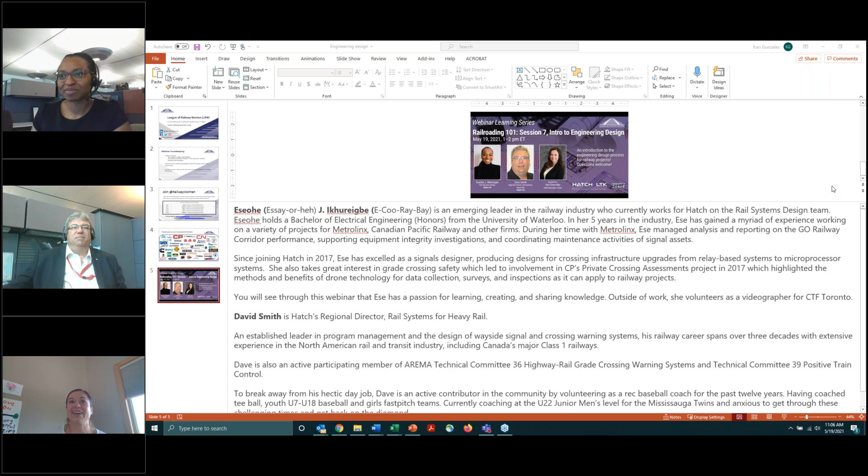Okay. All right, we can hear you, we can see you. I think you're ready to go. Okay, awesome, sounds good. Good day, everyone.

It is my pleasure to be presenting on the topic of Introduction to Engineering Design, specifically looking at railway applications as the overarching theme. The intent of this presentation is not meant to be predominantly technical. My aim is to provide a high-level overview to familiarize us with what engineering design is, why it's important, and what the engineering design process can look like within the railway industry.

A brief look at the outline for today: I will kick us off with a safety share. Safety is such a huge part of what we do, and one of the things we strive for within our various organizations is to achieve no harm. So I think it's important that we start off on a safety note. After that, I'll get right into engineering design, defining it, what the process is, and why it's important.

Then I'll switch gears into railway applications, looking at examples of applications. After that I'll cover the engineering project lifecycle overview, giving us a sense of what the lifecycle can look like for an engineering project. And I have a project example that I'll use to tie all the concepts together.

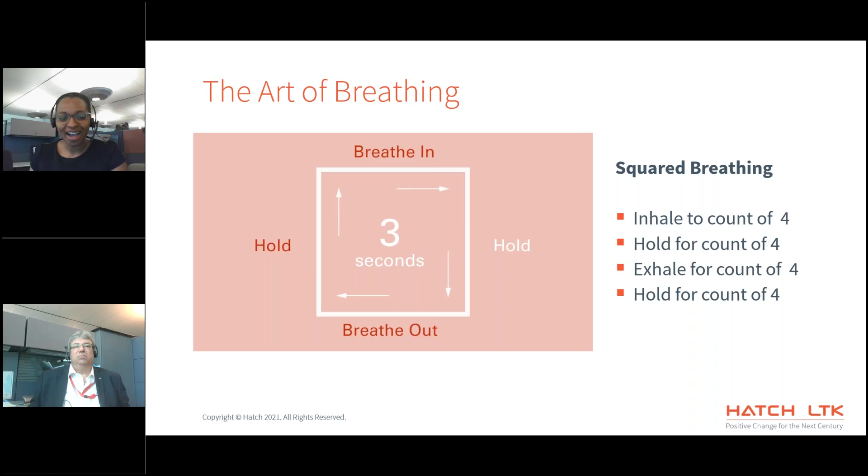There are so many ways we can breathe, but one method I picked for today is square breathing. Essentially how it's performed is we inhale for a count of 4, hold our breath for a count of 4, exhale for a count of 4, and hold for a count of 4. Before we carry on into the technical side of this presentation, I think it's important that we practice this, so I'm going to play a video on the next slide and have everyone do it with me.

I can't see everyone's reaction, but regardless of the day you've had, whether you've been on a high note or a low note, I think it's important that we both practice this together. So I encourage everyone to, wherever you are, sit up, relax your shoulders, and try to stay present in this moment.

I'm just going to cue that up. By the time I count down to 4, we're going to start off with the inhale. We'll inhale for 4 seconds, hold our breath for 4 seconds, then exhale for 4 seconds and hold for 4 seconds. I'll go 2 rounds of this, and there's going to be a visual cue that lets you know what cycle we're in.

Counting down now: 4, 3, 2, 1. And we hold.

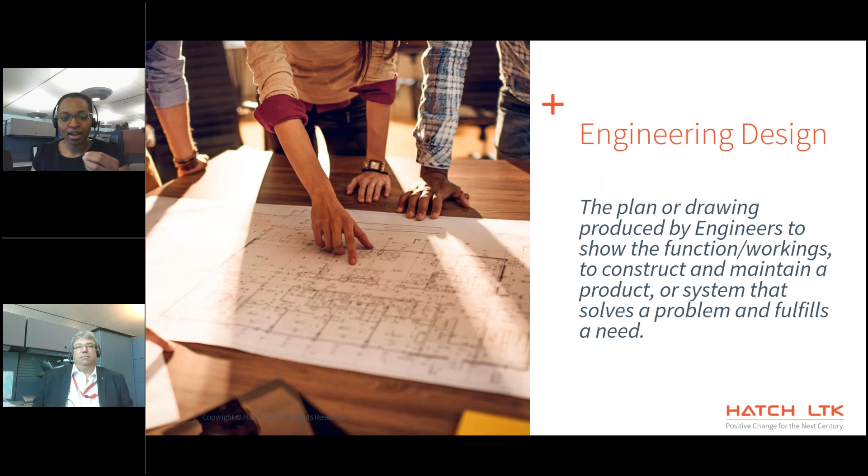The engineering design process is defined as a series of procedures that engineers follow to produce a solution to a problem. Essentially, it's the way that we get to the outcome of our solution, so all the methodologies and everything intricate to that portion is pretty much what the process is.

For example, consider a design-bid-build project that has a client who needs a problem solved. They outsource that design to the engineering consultant, who is responsible for the design of the solution. You also have a contractor, who can be outsourced to be responsible for building, testing, and commissioning that solution. And then a vendor, who is responsible for manufacturing and supplying the parts used for that solution. So what can the process look like for the different parties involved?

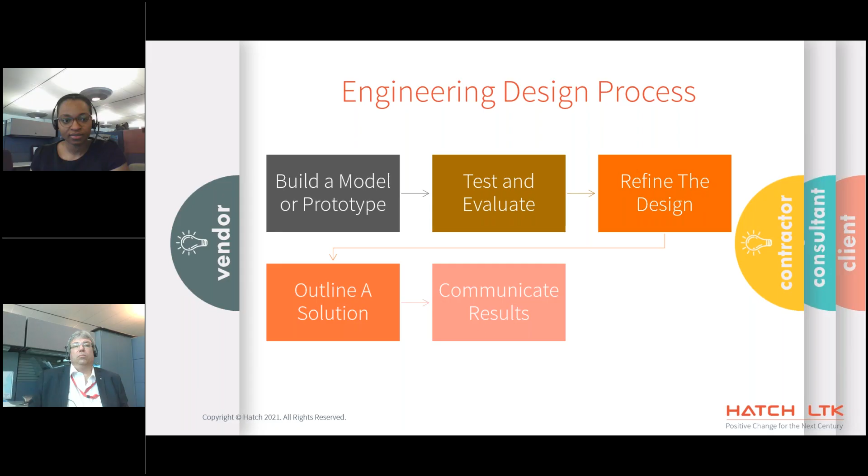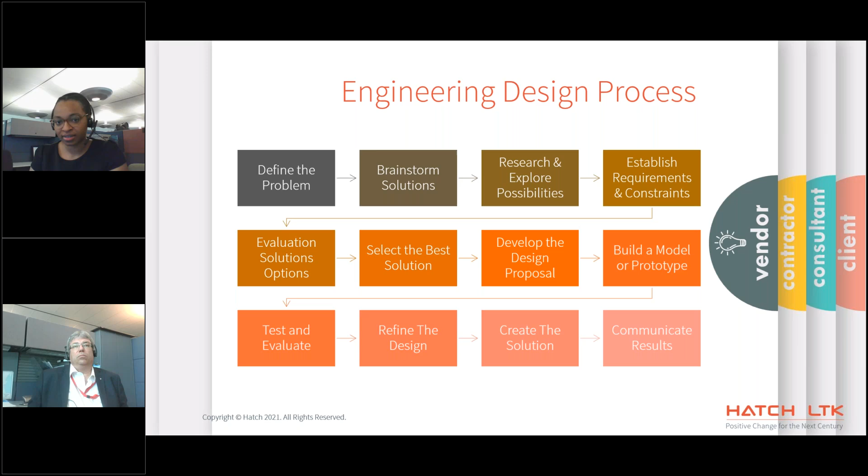One of the reasons why I have all the processes included here for the vendor is sometimes the vendor is just a supplier in terms of delivering the actual product, but sometimes the vendor is also the person that manufactures it. And so if the vendor, looking at the vendor as the manufacturer, then they do have to be able to go through all the processes involved, all the steps in the engineering design process, because typically they would be given a specific product that meets a technical need.

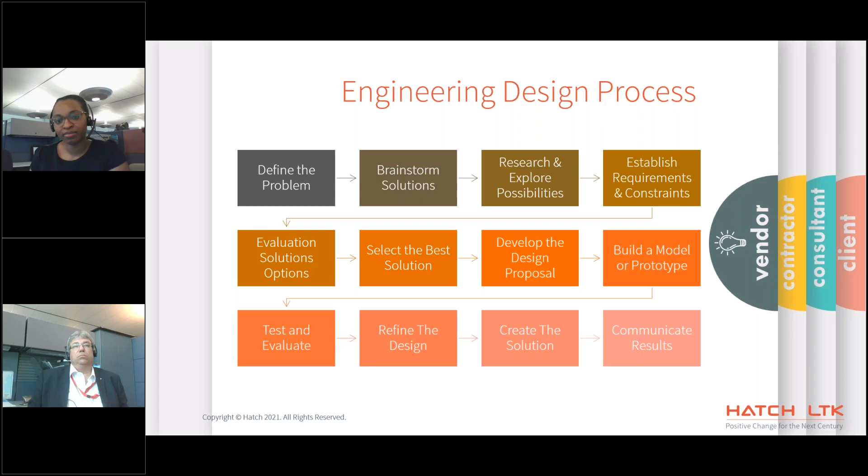And so sometimes, and in most cases, the manufacturers do have to follow the same design process that we would have, and it's pretty much similar to what we have on the consultant end, just the deliverables are different.

And so why is the engineering design process important? Well, three things that it does help do is it helps improve the quality of the design, help us produce designs efficiently, and helps us accurately meet the requirements.

Because the structure allows for us to be able to have an iterative process that helps us check our work, to know what we've done, to see that we're confident, to check it against as well the client requirements and scope, to see that we're meeting those needs. And because of the process, we are able to streamline and make things more efficient.

The cost for the engineering design process consists of resources in time and material. There is so much that's put into play in regards to what we have to do for the designs, in regards to people, expertise, factoring the materials, the actual items that we're going to use for the build.

To make sure that those materials satisfy what we need them to do. Being able to manage those resources is a huge part of the design process, and that's what it typically entails.

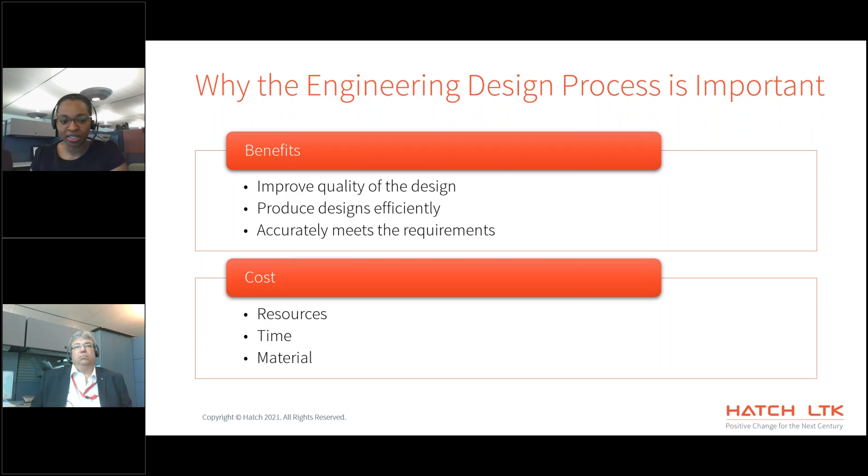Engineering design and railway applications. In this next section, I'll be diving into the process of looking at the railway a bit more specifically, highlighting some project examples and the life cycle of the project and what that can entail.

Engineering design is important to sustain and advance the industry, and we do this by building or designing new infrastructure, as well as upgrading the existing infrastructure that we have.

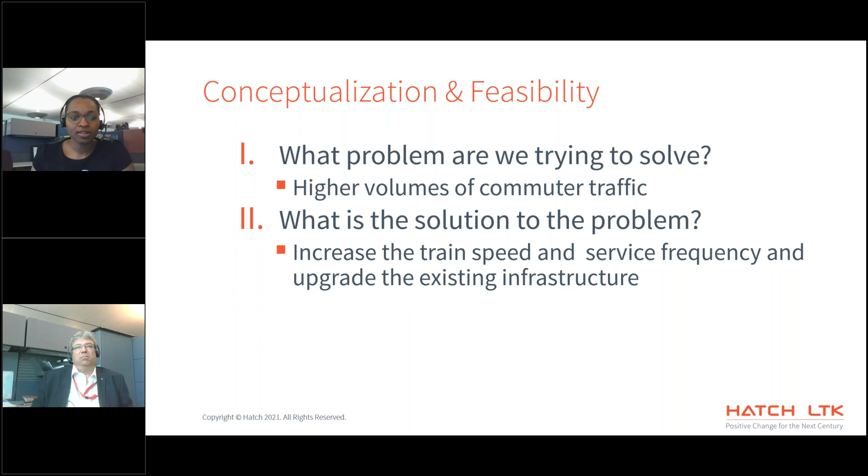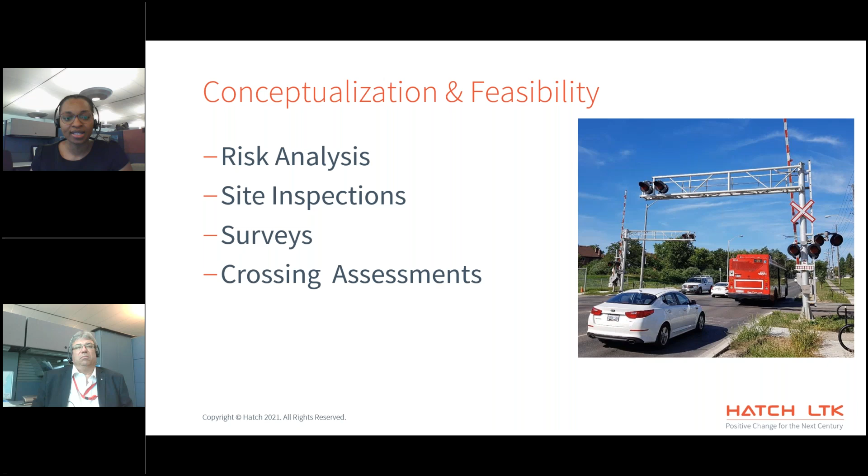Some of the other things we looked at for conceptualization and feasibility, on the design side, included risk analysis, site inspections, surveys, and crossing assessments - these were all things we had to do to make sure we could get our data. Typically for a site inspection, we would go to the site, take pictures, whatever measurements we need, and also draft whatever questions or assumptions, things that seem a bit unclear.

One important aspect of the conceptualization and feasibility side is that this is the time we need to figure out what the inputs are that we're looking for, what the state of the existing infrastructure is, and what our assessment is of what is and what we need to do.

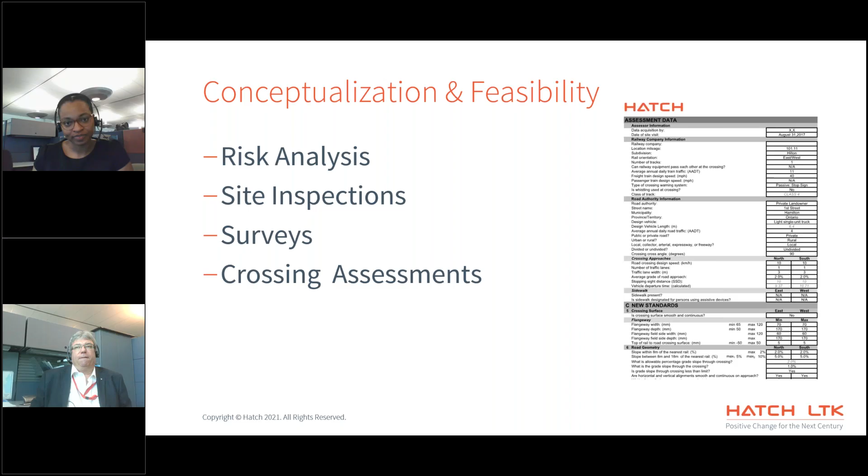The preliminary engineering design - one of the major things it does is frame the scope of what will be done to solve the problem. The design considerations we typically factor in are the client requirements, the constraints we've been given, whatever assumptions need to be made, as well as the standards.

Some of the standards I used specifically for this project in reference was AREMA. For the crossings, we typically would refer to the Transport Canada grade crossings, as well as whatever client standards we have. Essentially what we were doing at this stage was looking exactly at what we needed to meet - for example, one of the things for the crossings,

one important thing is the type of system we're going to install based on the requirements. The gate delay is huge - being able to determine how much gate delay we need before we can activate a crossing, before we can have the cars come across the railway track. So that's something we would typically check.

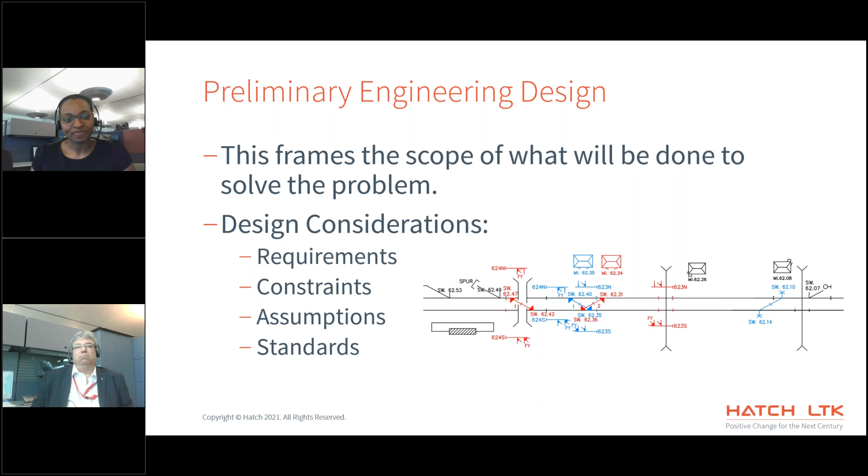In regards to the detailed design, there are two main aspects: the issue for review that we'll typically submit, as well as the issue for construction drawings. For the issue for review drawings, in this case we had about one review stage, where we'll have the designs created and issue them to the client to review. The construction drawings are the ones that are actually going to be built.

This is an example of one of the sheets from our signal drawings, showing the crossing in the middle and the crossovers as well on the side.

The key components to the detailed design drawings are typically the legend, which defines what the symbols on the drawings mean, as well as the notes, which essentially illustrate what we would have for the signals. Some other main items are the signal housing equipment, the cables, and the crossing warning protection system.

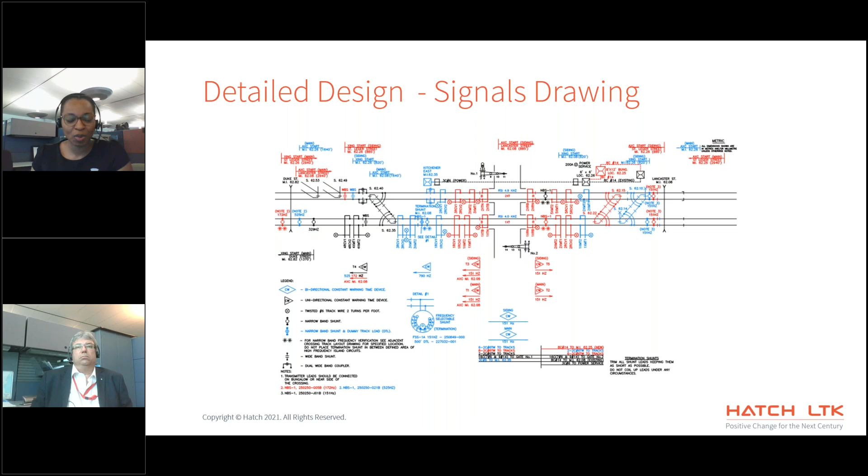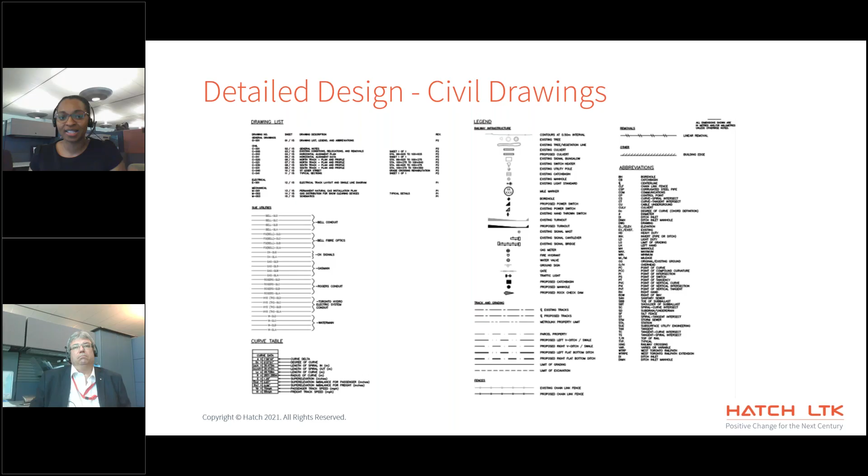For the civil drawings, they're different from the signals. This is the drawing list as well as the legend that defines everything within the civil drawings. This is an illustration of our civil drawings in terms of the alignment and the crossover, which is shown by the black symbol in the middle.

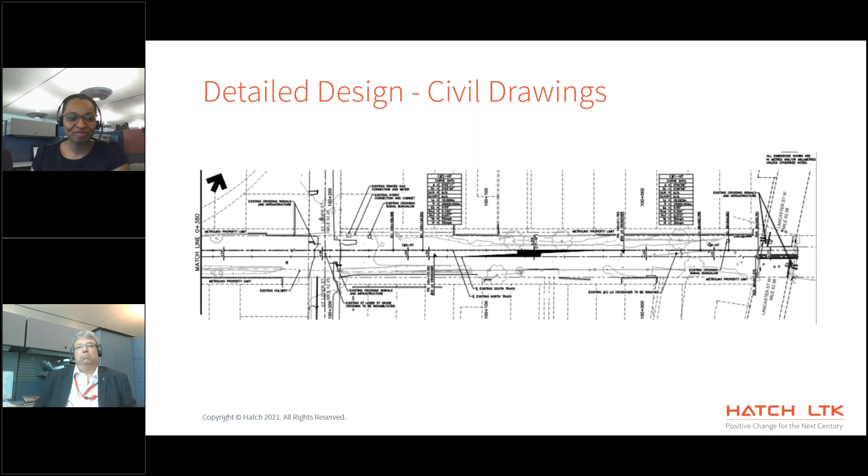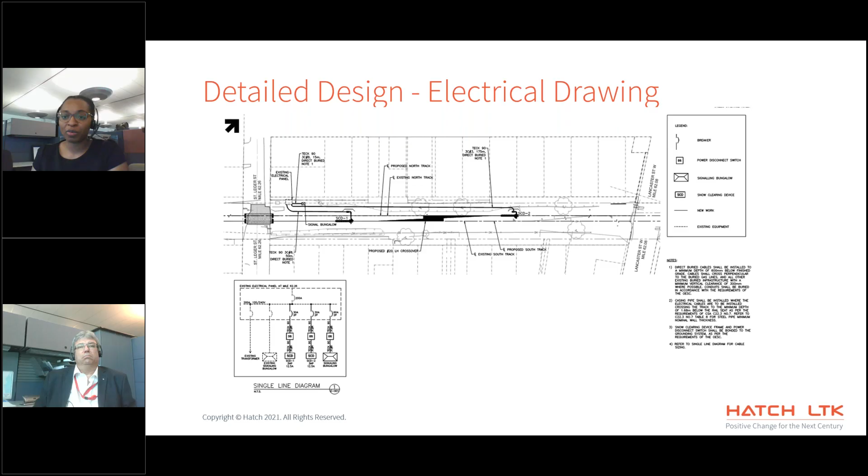The second to last part of the project cycle was the execution, testing, and commissioning. Typically, when the design is done, we have to build, test, and make sure that everything works according to how we want it. Coordination is such a huge part of making a project successful.

We have different stakeholders we have to consistently be in touch with: the clients, the contractors, the consultants, coordinating to make sure everything goes according to plan. We would typically have the schedule based off of those coordination meetings, aligned accordingly.

There'll be factory acceptance testing done in regards to the signal equipment or whatever equipment was built. We had the installation phase after the factory acceptance test for the on-site work. System acceptance testing ensures that the system is working as it should be.

For the main commissioning, we had a long commissioning weekend where we ensured that we were able to close off and disconnect the existing equipment, tie in the new equipment for the upgrades, and make sure that everything was working as it should be.

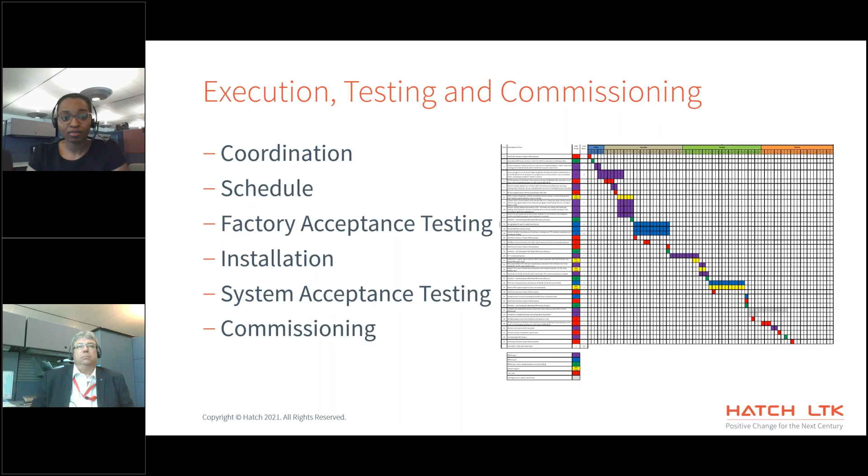The final stage is the safety certification stage. We had the project walkthrough, working through the site to make sure everything is as it should be. There's typically an in-service certificate signed by the engineering consultant, the client, and the contractor doing the build and testing, to make sure everything is built as it should be.

Last but not least is the as-built and record drawings. This is a huge part of documentation, making sure we have all the drawings and designs updated to match the actual site work that was done.

A key takeaway for the design process is the importance of understanding the requirements, knowing what the problem is that we're trying to solve, and all the parameters that ensure we are designing and meeting the solutions we need to create.

Verifying and confirming is a huge part of the design process because there's so much information that a designer gets, and we have to ensure that technically, in regards to the source of that information, it is correct to the industry standards that we have.

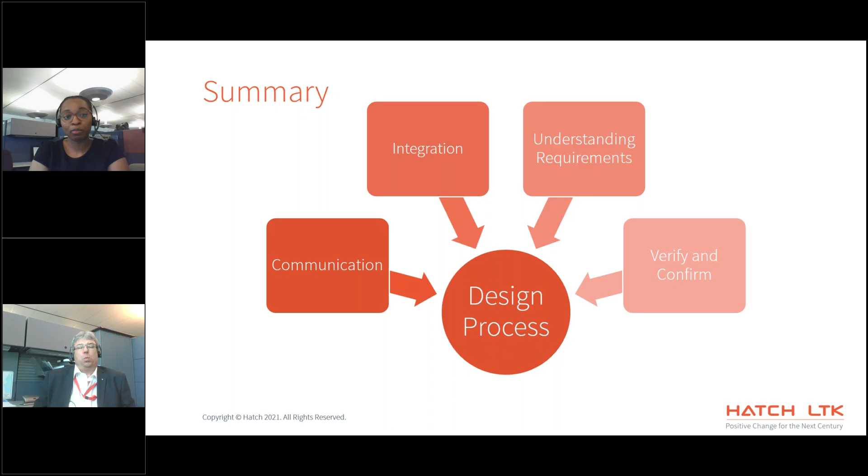Communication is huge because with all the players involved, it's important that we're communicating to make sure everyone understands the different parts they need to play within the project for it to be successful. That ties into integration, which is a big part of tying everything together to make sure the project is successful. That's about it for the design process.

Wonderful. Well, thank you so much for taking us through that. I do have a few questions, and you can decide if you want to take them or put a little pressure on Dave there. Yes, I think we'll do that.

One of the questions that has come up is in regard to the makeup of teams and how you work with different types of professions within these larger programs. Can you talk about the types of other skill sets and people you're working with throughout this process, and how you may approach one situation versus the next?

Well, that's a loaded question. And Dave, feel free to chime in if you need to.

So typically, I'll use Project Alpha as an example. I was on the signals design team. We had a civil/track design team as well. There was an electrical design team, and I believe we had utilities as well. So typically, I interfaced with the electrical and civil design groups.

In regards to the teams, typically we would have a designer who is responsible for doing the first level designs. Then we have two other stages where we have a checker, and then our engineer of record, who is the person responsible for sealing the drawings and ensuring that they are to standards.